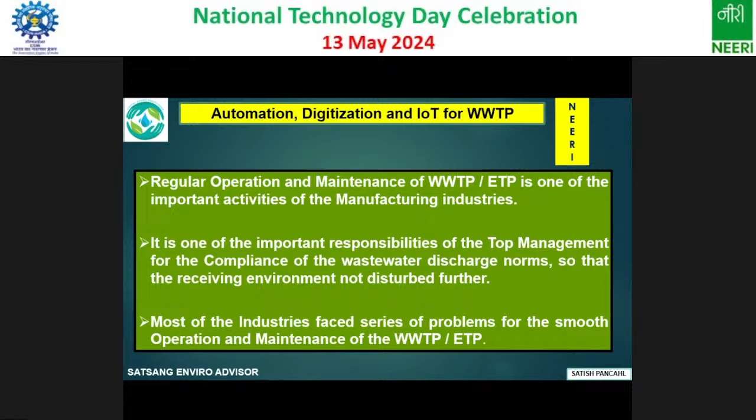So most of the industries have a double standard. So we have to convince the industry and train them.

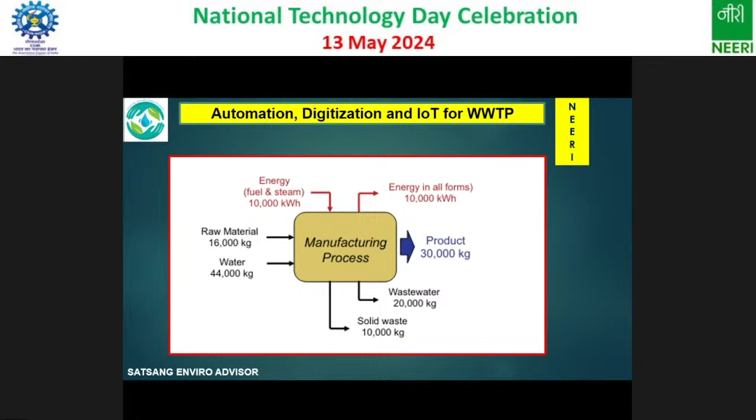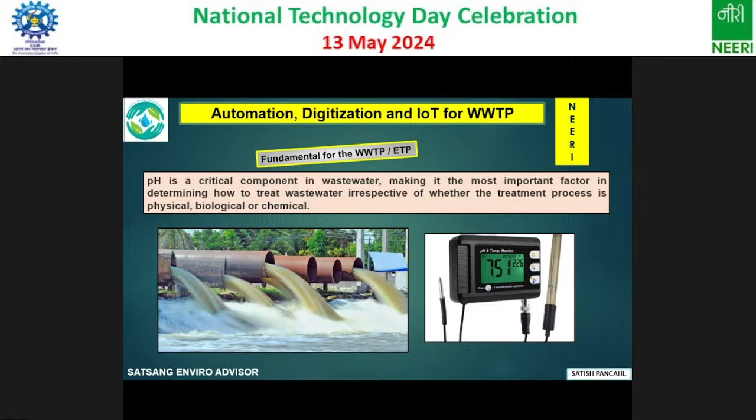Now sewage treatment plant, a lot of time we discuss why the sewage treatment plant is not functioning. What we discharge in the sewage treatment plant from our home: we wash our floor, we use a lot of acid, we use a lot of alkaline in the washing machine, floor washing, a lot of phenyl we are using. That all goes to the sewage. Even sometimes the sewage treatment plant, you cannot check what is going on. It contains a lot of solid materials.

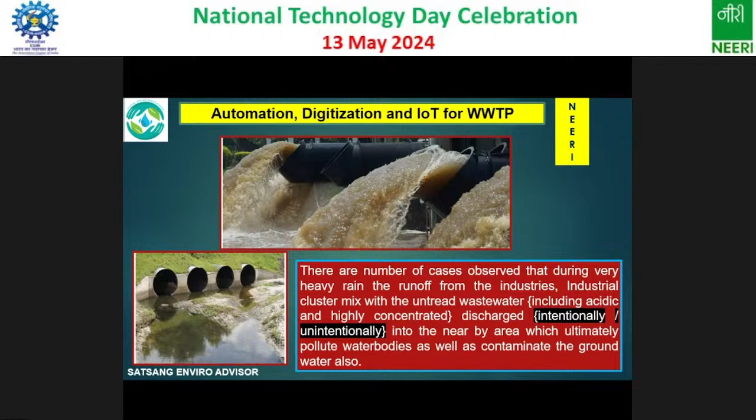Even recently you read in the newspaper or on TV also, Dubai had a flood. As Madam had mentioned, I was working with the Kuwait KNPC in 2005 when I joined in the month of January. And in my first round in the introduction, I asked a simple question: do you have a stormwater tank? They said we don't have rain. Just imagine, they have to construct a stormwater tank. So the entire situation has been changing day by day.

Second point is the neutralization, where we have to check the acidic wastewater or alkaline wastewater. Generally in industry, this is the area of R&D, I can say. Not R&D, research, development and demonstration. Now we have to change the name. Recently I was reading the article on Dubai mega trends, the 50 mega trends, Dubai Future Foundation, and they mentioned R&D as research, development and demonstration. Sir has already mentioned that demonstration is very important.

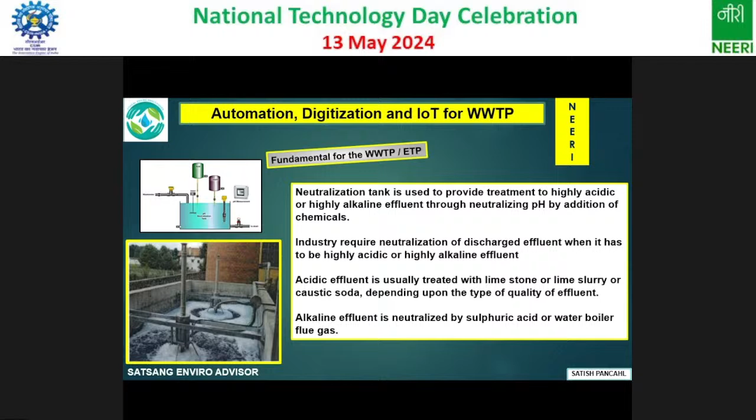But what happened? It will give an instant result. Nowadays, like instant food, an instant result comes. But they damage your entire agitating machinery. They deposit the solids and they create a further problem in your plant system.

I mentioned one of the names, Professor M.T. Pandya. Dr. M.T. Pandya, I think you have heard the name. He was a professor of Jain Engineering College. He was associated with us in 97, 98 in one of the biodegradable issues. And at that time, he advised: forget about the lime, do R&D on different solutions. So at that time, we checked caustic lye, caustic flakes, soda ash, and then we decided a caustic lye 10%, 15% solution is the best solution for neutralization. So neutralization is very important.

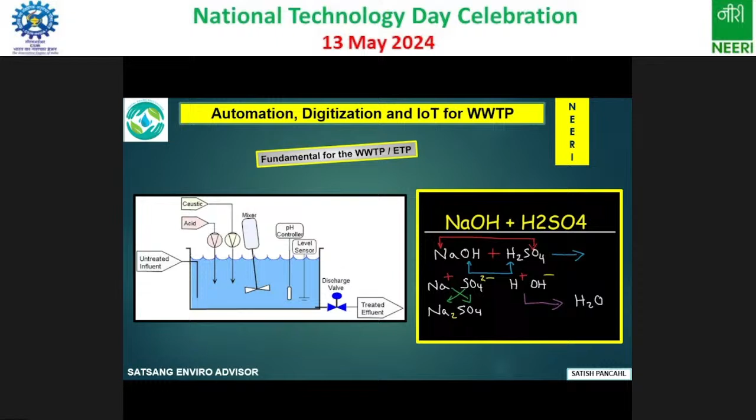So everybody knows. So how to do digitization here? We did digitization by putting a dosing pump. And the dosing pump you can control with IoT. So you can check from your home also how much lye has gone into my neutralization area. So this is possible now. Technology is available. So an IoT-based pump monitoring system can improve efficiency, visibility, and predictive maintenance also. Because in a wastewater treatment plant, maintenance is very high, because nobody is looking after it very seriously.

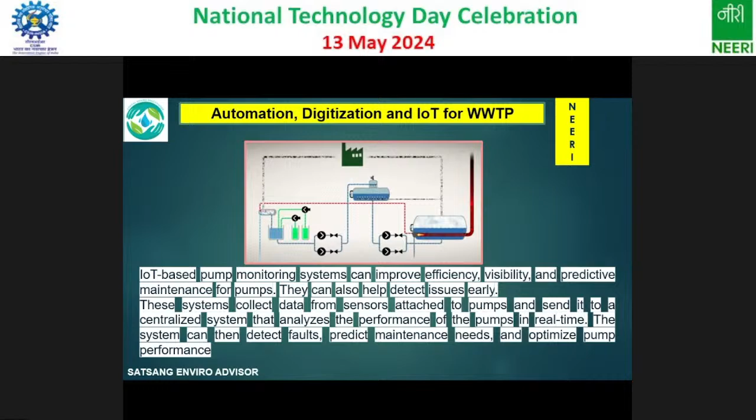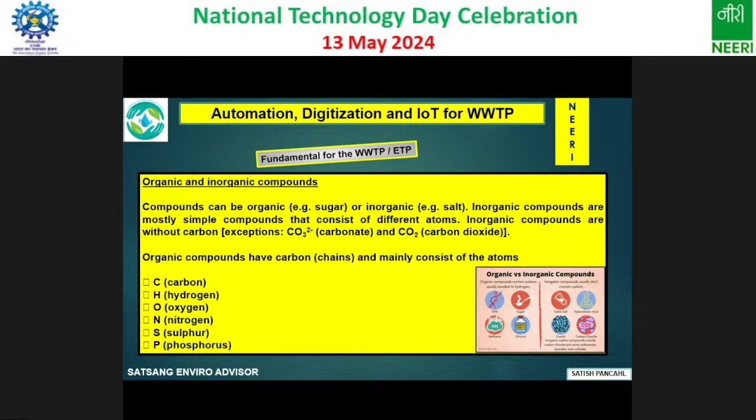Then after that, we move on from neutralization. Now we have to identify which are organic and which are inorganic. Because we have the activated sludge process, trickling filter, even RBC, the rotating biological contactor, it is a failure in India. When I visited Munich in 2018, I had seen a number of RBCs. They contacted us, why don't you market my product in India. But it is a failure in India. But it is a very simple technology. Why is it a failure? It's a surprise. Because we are not concerned about regular maintenance. So carbon, hydrogen, oxygen, nitrogen, sulfur, and phosphorus, we all know all this. But why should I mention it here? Because this is the fundamental of wastewater.

Then it comes to coagulation and flocculation. Generally, they add alum and polyelectrolyte. 300 rupees a kg, 400 rupees a kg.

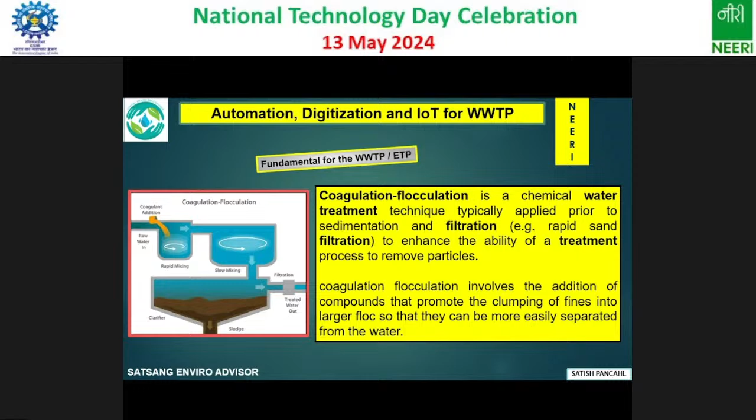In one of the pulp and paper industries in Surat, it has a 26,000 meter cube per day treatment plant. It was a very scientifically designed treatment plant. But when we went for the operation, we faced a lot of difficulties due to bypassing of the flocculation and coagulation tank. So these are the issues you face in the industry. Then comes the equalization bit. So once you have flocculated, coagulated wastewater, now you have to do equalization.

And in the morning I discussed with Prakash Bhai, why is CETP failing? You know, the CETP concept, even Professor Khanna also emphasized at that time, it must be a homogeneous nature of wastewater, and then you can design a wastewater treatment plant. But nowadays, it is a heterogeneous nature of wastewater. It is very difficult. You visit any CETP plant, it is very difficult. But now, as a scientist, as an engineer, we have to find the solution.

Why shouldn't agrochemicals, petrochemicals, then drug and pharma, then the electrochem industry, all these plants have primary treatment? Remove the metal, remove the toxics, and then go to aerobic treatment for the CETP, if we want to go for a CETP. So flow equalization is very important.

Here, the diffused aeration system, a lot of people use. And diffused aeration systems mostly come from abroad. But now with simple technology we implemented in one company, we just made laterals and a header and put a good quality blower after calculating the flow rate and others. It works.

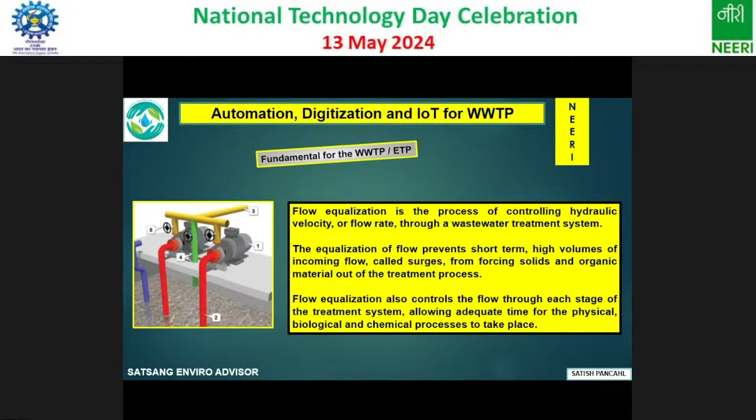In 1998 I had implemented it, and till now it is working. Yesterday I got the message, sir. मैं पूछा था भाई वो चल रहा है, मैं कल बोलने वाला हूँ, so it is working. So sometimes jugaad also works, but it's a scientific jugaad, not only just to put in show.

Then primary clarifier. Here I mentioned the name of Dr. Badri Narayana. When he visited my plant in '97, he observed a typical smell. We had just acclimatized to the smell, so we had not observed any smell. And he said, Mr. Panchal, this is a typical anaerobic smell. What are you doing? So we discharged the primary bottom sludge into one sump, and then from the sump we discharged into the drying bed, and it was retained for a few days. So anaerobic conditions developed. He made a simple solution.

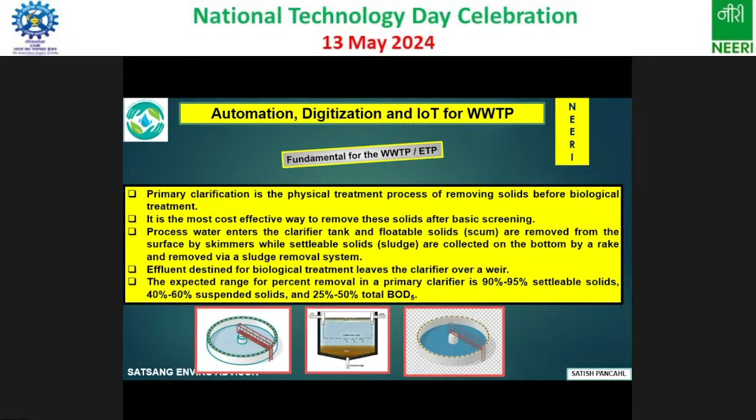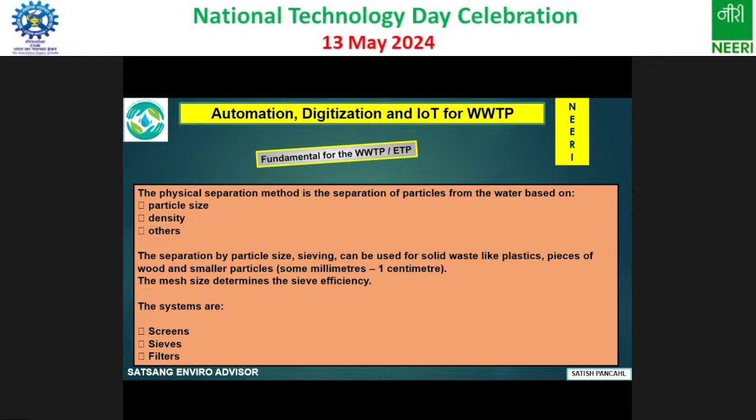So it depends on particle size, density, and others. Other methodologies are also there, screen, sieve, and filters that I think we already learned. And these are the different steps of the treatment. So screening, sedimentation, flotation, biological process, you may go for a trickling filter, you may go for RBC, you may go for ASP, anaerobic digester. I think anaerobic digester is called a failed technology in India. A lot of people say it is not working. It is not failed, it is an operation issue.

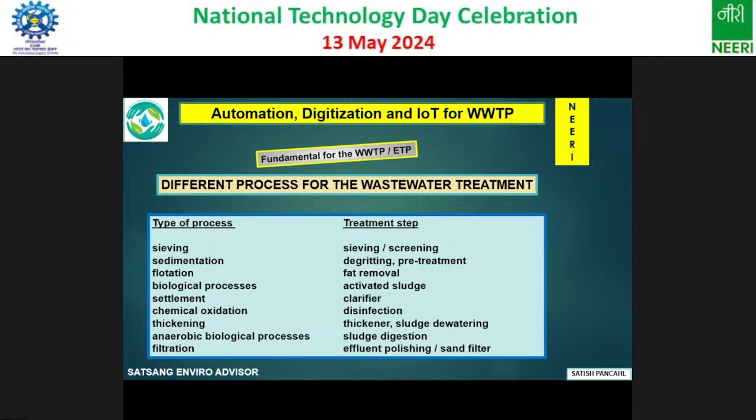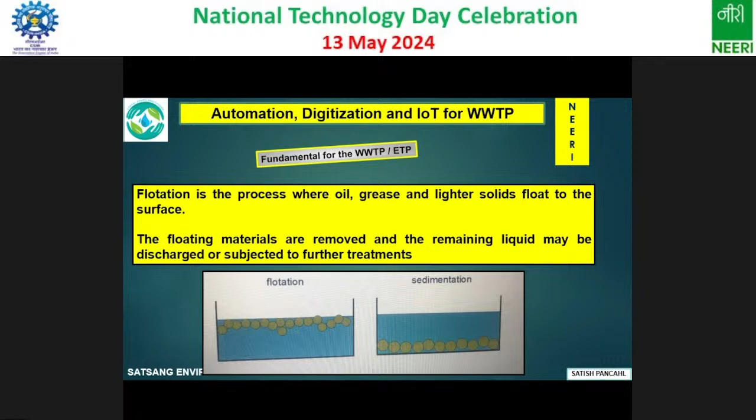There are a lot of plants we have observed in Gujarat. It is not a failed technology. We are not concentrating on the operation and maintenance. Then anaerobic and filtration. And these all are the treatment steps. Flotation and sedimentation, I already mentioned. So I think in the morning you already saw some of the decentralized sewage treatment plants. So the same concept. This is engineering, you are scientists, so we mix together and find out a solution.

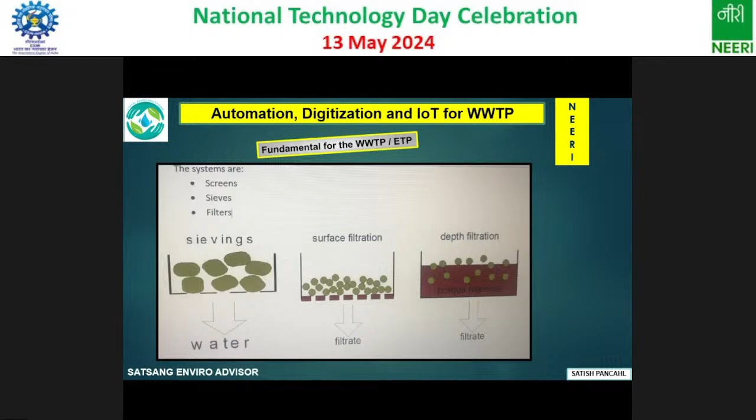The sieving like this one, I think this is your case. The sieving, then surface filtration and depth filtration. तीनों point आपने cover किया. So it is already there in place, already mentioned in the engineering philosophy. In the chemical process, as I said, we add ferrous ammonium sulfate. Then we add the polyelectrolyte. So these all are the reactions. And sometimes disinfection is used to kill the bacteria.

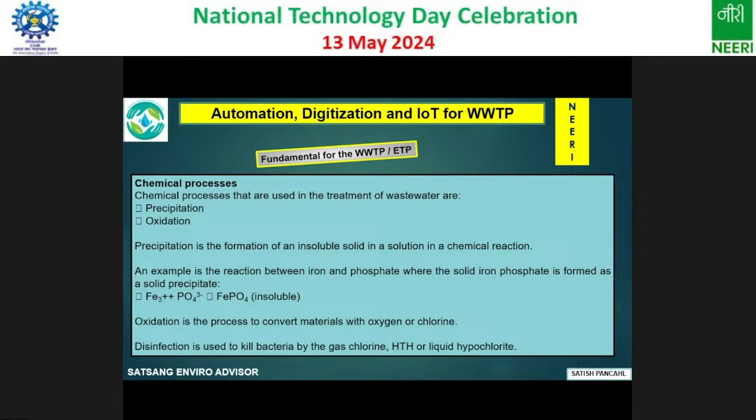So the rotating scum troughs and skimmers effectively remove all grease, scum and floating material. Come until and unless the as-built drawing and original drawing meet the same criteria.

Then this system will work. Otherwise, industry is ready to spend the money, but they are not getting the result. So this is a very important issue. Some of the industries are now more ethical, even one of the industries I worked for 10 years.

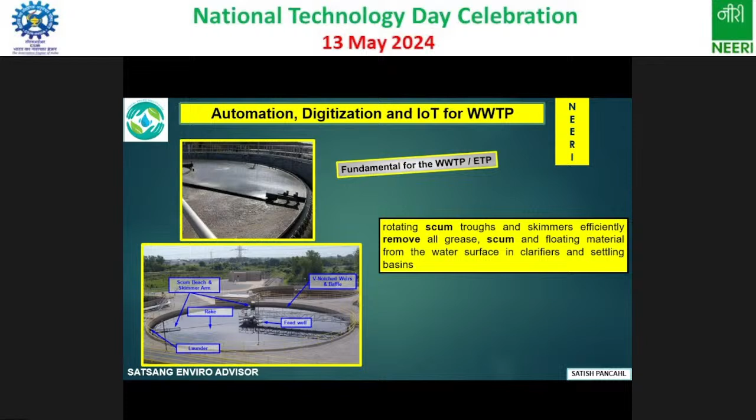Dr. Shyam Asolekar spent at least 3 months in 2018-19, before COVID. He made the material balance of 6 industries, and those are very dangerous manufactures: H-acid, vinyl sulphone, DASA, and dye intermediates. It contained all the pollutants, and he evaluated what the solid waste generation is versus what they explain to the authority. Vast difference. So you cannot solve the problem overnight. You have to go more and more deep.

Sludge dewatering. This is very important. Actually, my main interest is sludge dewatering. During 1999, we faced a serious problem. Dr. Badrinara visited my plant, and he said, Mr. Panchal, sorry, I'm not happy with the performance of your plant. Because we mixed primary clarifier sludge and secondary clarifier sludge in drying beds, it never dried, even at 40-degree temperature, up to 15 days, 20 days.

Then we decided, let us have some sort of dewatering system. My management gave full authority, even the project department. Mr. Panchal, you find out the agency. I visited Nagpur, Pune, Hyderabad, Chennai, Delhi. I gave 200 liter slurry samples, and I gave a contract also for a small amount. You just give a solution. At that time, Bharat Enviro Engineers gave a solution of a rotary vacuum filter. We installed it in 1999 for 20 lakhs of rupees, only for primary clarifier.

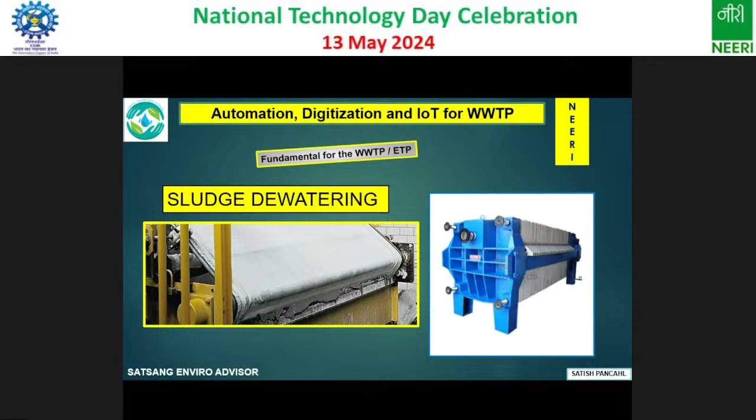But this system is working. And the filter press, I think in most industries in Maharashtra, I had visited some of the industrial belts. There are a number of filter presses, but it is so dirty you don't feel like going there. So how to make it smart? How to make it clean? That is our activity.

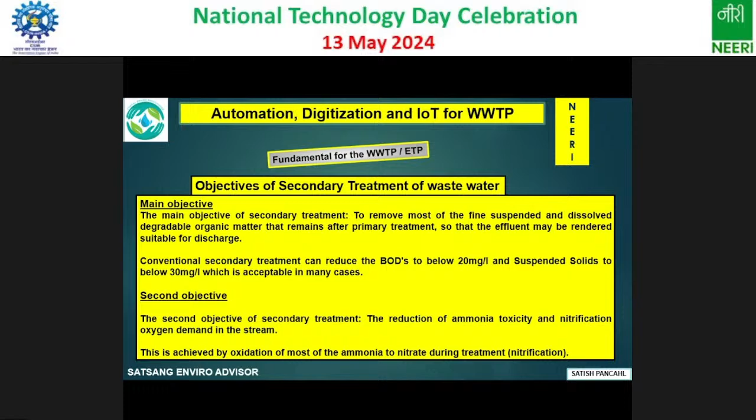You ask them, do you know denitrification happens, and they don't know this. We just call the casual worker and remove the top sludge - this is the only answer. So proper engineering, proper science has to be implemented. We implemented this in one of the industries in that area.

So there are three types: aerobic, anaerobic and facultative mixed type of treatment. This is very important - it may have a diffuse aerator, a surface aerator, or different aerators nowadays.

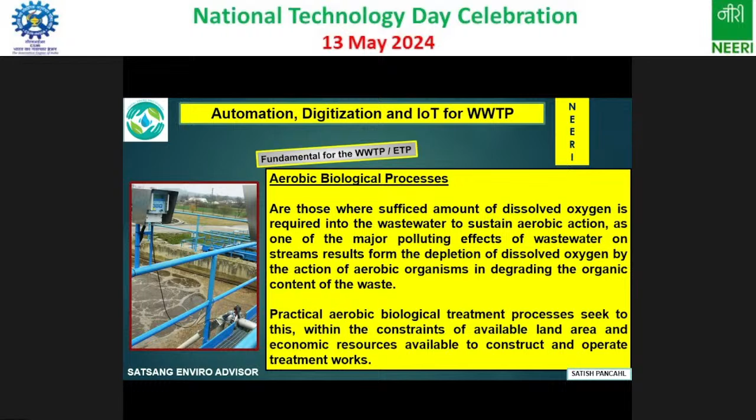Then anaerobic treatment, as I mentioned, basically produces biogas, but it is considered a failed technology by some. But I have good experience in Ashok Organic, as I mentioned earlier. There is one good plant, India's first biogas plant. They have a distillery, molasses and spent wash.

Spent wash has a highly acidic nature, 3 to 4 pH, high COD of 3 to 4 lakhs, and very high temperature. So that wastewater we treat and generate biogas, and that biogas we supply to the boiler, and the boiler generates steam. That steam is supplied to the fermentation process for acetic acid manufacturing.

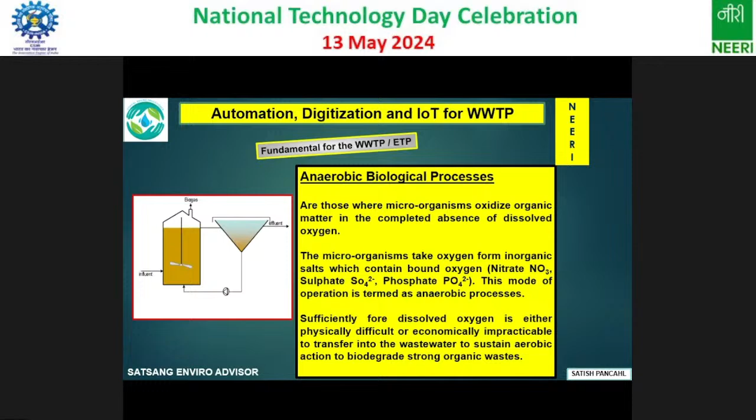So these technologies are good, but they have to be properly understood, properly designed and properly operated. As I mentioned, trickling filter and RBC we don't prefer, but RBC is a good technology in a decentralized way. Activated sludge, oxidation pond - a lot of people use these, but now land is not available, so you cannot go for oxidation pond. And aerated lagoon - you can change the name of aerated zone bioreactor to aerated lagoon.

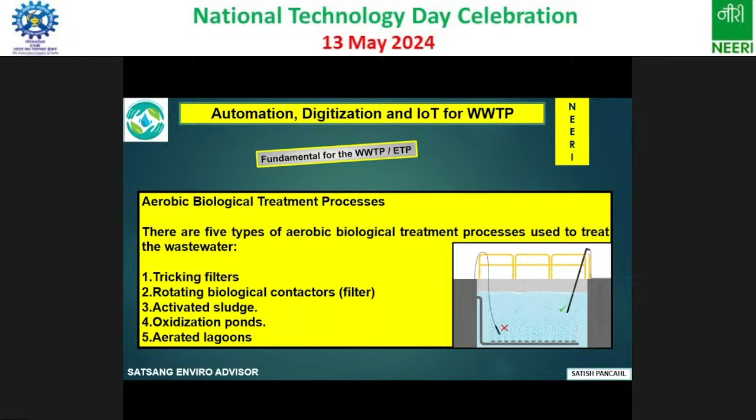This works, industry people do this. So in activated sludge process, the few important parameters are like MLSS, mixed liquor suspended solids. I think a lot of students are here, you just need to understand how to analyze. Even I remember when NEERI people visited my plant in '97, they asked me, Mr...

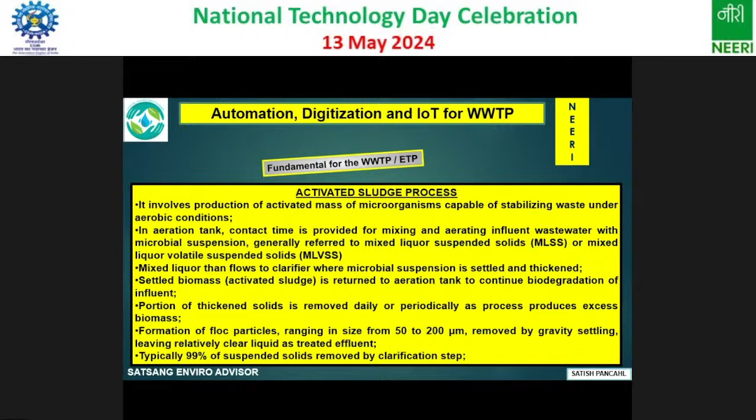So typically 99% suspended solid is removed in a clarification step, primary and secondary. Everything is everywhere, but the environment selects. This is very important for microbes. Microbes play a very important role to degrade the pollutant - any pollutant they degrade. Only thing is we have to be smart, like the microbes.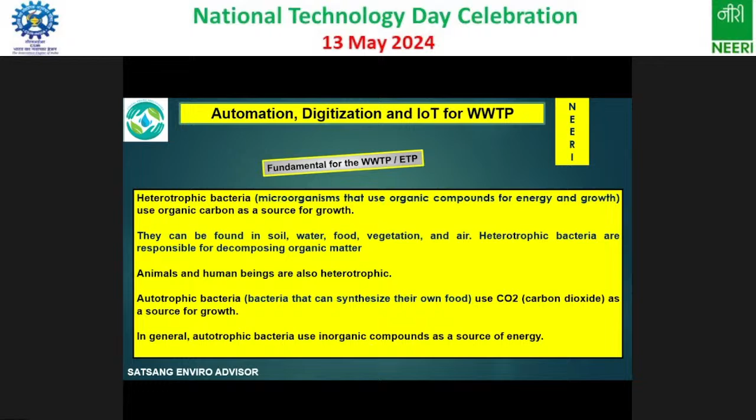There are two types of microbes, heterotrophic as well as autotrophic. I think people are aware. Microorganisms that use organic compound for energy and growth are called heterotrophic, and bacteria that synthesize their own food, like with the sun and atmosphere, are autotrophic. We have to choose the right bacteria.

There is a lot of demand in microbiology. I think in MS University, those passing MSc microbiology have very high demand. But most of them join the pharma industry, not the environment industry. So whenever we have discussion in the university, we always say send 2 out of 10-12 students here, so we can also develop our microbes further. But now the trend has changed.

Bacteria will grow when enough food is available. Now what is enough food? The wastewater itself is enough food.

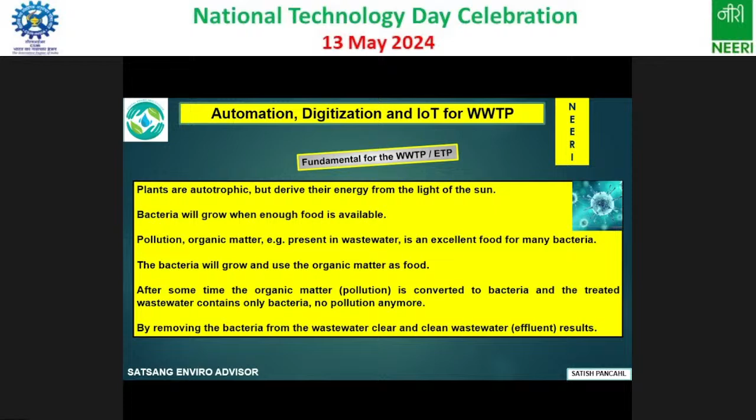So just imagine, it gives an instant result, but it's better to develop bacteria through soil enrichment technology or microbes. After some time, organic pollutant is converted to bacteria, and the treated wastewater contains only bacteria, no pollution anymore. That is a tertiary treatment we can implement.

Attached growth, suspended growth - I think these are part of the activated sludge process. But my main interest is to highlight the role of microbes, because microbes are responsible for treatment and maintaining liquid suspension through appropriate mixing method. That's why we require a diffuse aerator or whatever aerator is available.

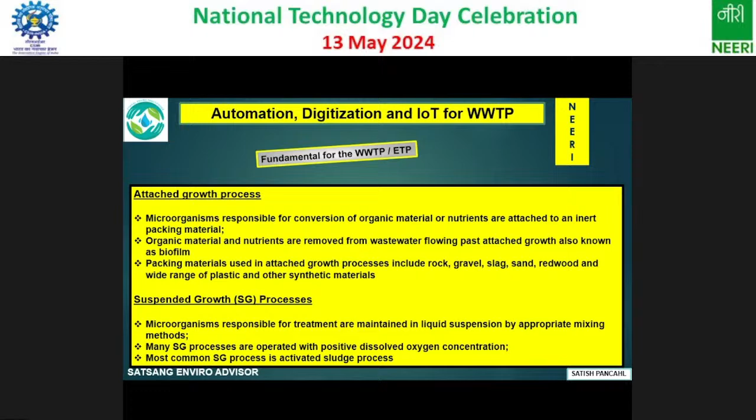Nowadays many new names are given just to sell the technology. Lot of consultants are available in the market. Biological processes are conversion processes of material by living organisms which degrade it.

Wastewater treatment bacteria are the most important group of bacteria - they are the workhorses of the activated sludge process. They are like our army, and we should protect them.

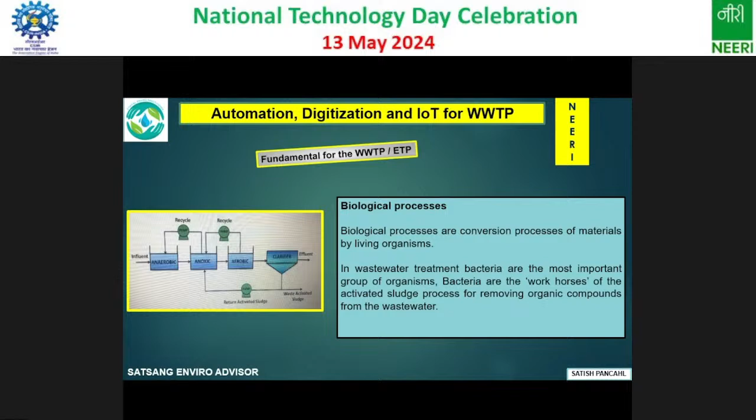Now a lot of people don't understand the importance of this parameter. It's like in food, everyone needs this vitamin or that - nowadays everyone is deficient in B12, D3, everywhere you go they say you're low in D3 or B12. So BOD, N, P is very important for the activated sludge process.

In 1997, we calculated on a daily basis - how much BOD is there, how much nitrogen is required, and how much phosphorus is there. Before that, we just used to add urea every day for nitrification. For phosphoric acid, they'd say just pour in a can of phosphoric acid, a 5 or 10 liter can. Then we implemented automation - a simple dosing pump.

वो भी 25,000 का आता है, उस टाइम 15,000 का आता होगा, अभी 25,000 का. उसमें भी innovation बहुत है.

Synthetic wastewater prepared using methanol, glucose, and acetate as combined carbon source, ammonium chloride as a nitrogen source, and dipotassium hydrogen phosphate as a phosphorus source.

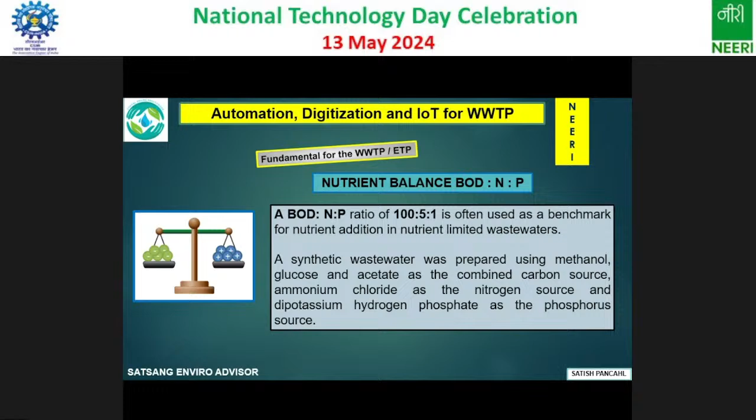Phosphoric acid, यूरिया में कितना है? यूरिया का फॉर्मूला भी नहीं आता है. After working 20 years in the industry, we asked the question, can we explain the formula of urea? Every day the urea का खेलता है, पर वो नहीं बताता. So that is very important.

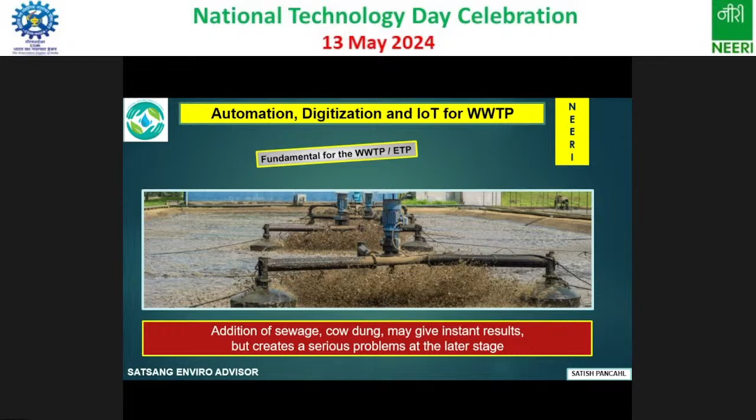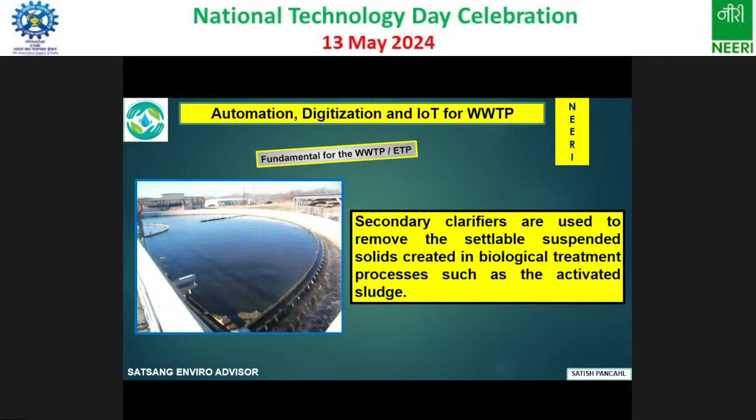So why should they not have a separate sewage treatment? So secondary clarifier used to remove the remaining parameters, remaining suspended solids. जो recycle sludge, जो aging of sludge हो गया उसके बाद.

No smell, इतना अच्छा and they are not allowed to construct even one brick because there is resistance from the Thane people not to allow any further expansion. तो वो बम्बू लेके ड्रम के अंदर बम्बू रखते थे और पूरा टारपोलिन लगा के मॉनसून में कंट्रोल करते थे. सेम टेक्नोलॉजी में इम्प्लीमेंट किया and within 1 lakh rupees cost we just settled all the sludge.

Primary separate कर दिया. And second, this is only secondary sludge. And what we have done further, we made a compartment. Now Monday we discharge in one compartment, Tuesday in the second compartment, Wednesday this one, Thursday this one. And within a week, I have a liberty.

ये खाली हो गया, दूसरे दिन वो ले सकता हूँ, तीसरे दिन ये ले सकता हूँ. So we have a liberty. So this is a smart automation I can see. Land is not available nowadays, but whatever land is available, we have to make it very systematic. And this is a very important area in all industries.

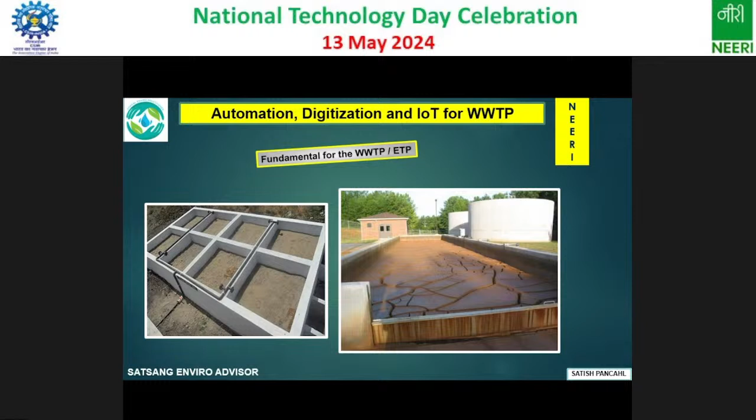You visit any industry, PSU or MNC, this is the most dirtiest area. अब कहीं भी जाइए, मैं आपको खुलकर बताता हूं, मेरा 35 years का experience है, मैं कई industry में visit किया है, मुझे तो ये एरिया बहुत गंदा लगा. But now people have realized, समझ रहे हैं कि कैसे improve किया.

Now another thing, industry always wants to know cost, economy and environment. हमको मैनेज करना है, डाइवोर्स नहीं करना है. तो लंबा तक रहे - हम बात कर रहे थे कि आजकल डाइवोर्स भी बढ़ रहा है, डाइवोर्स रेट भी बढ़ रहा है. तो इसमें भी डाइवोर्स रेट पहले से ही था. तो हमको तो उसमें महाराज बनके प्रॉपर शादी कराना है.

How we can maintain this? So how can we convince the authority or the top management, chairman, president or managing director about the costs? What are my chemical costs? What are my electricity costs? What are my sludge transportation costs?

If I use lime, my sludge cost is very high. When my sludge cost is high, my disposal cost is also high. Now landfill is not available. Now in Baroda, they are not going to expand any landfill. It is very difficult to get approval. And there is a lot of resistance from the community also.

Not in my backyard - no one wants kachara. And why should we end up like that? Superfund issue in America - आज भी चल रहा है, 150 साल पुराना issue आज भी चल रहा है. But that is a developed nation who can afford it. But India cannot afford it. हमको वैसा situation नहीं देखना है. हम तो नहीं रहेंगे 100 साल बाद, but it may happen. So हमें management को convince करना है.

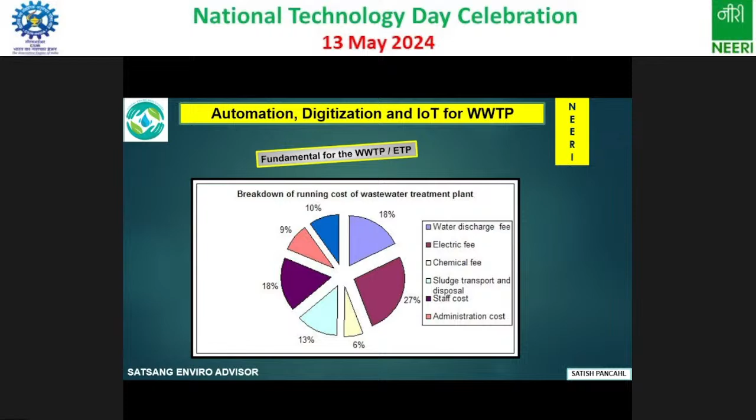Administrative cost तो आपका है ही, वो तो मैन पावर है. You cannot consider it as a separate cost of environment, but I consider it as an administrative cost in environment, so I can contribute further, and this data will help in ESG implementation. Environment, society, and governance में बहुत important आता है.

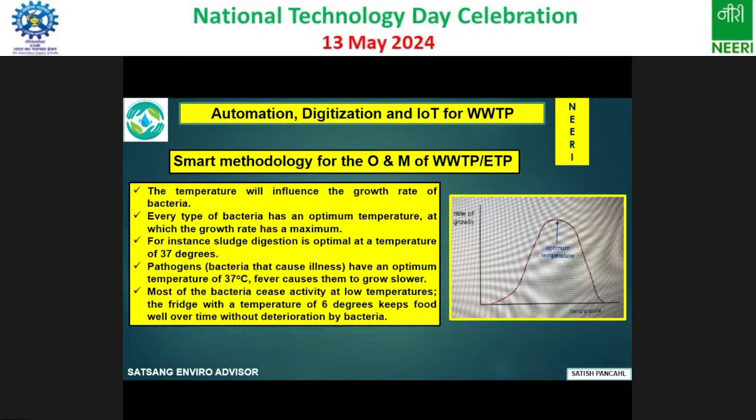Temperature, that is very important as I mentioned. We have to measure the temperature. But I had seen in Kuwait also, the activated sludge process, same process, even at 50-55 temperature, ASP working very nice. No issue. I had seen in 1 year the entire refinery waste; in spite of a lot of oil and grease problems, the ASP is working very fine. So ASP is a very good technology. I am not marketing ASP, but this is a technology.

Dissolved oxygen, it has to be in between 1 to 2, it has to be maintained, and a dedicated instrument has to be implemented in every ASP. अगर ASP इसके बिना है तो allow ही नहीं करना चाहिए. Sorry, I am not going to approve your activated sludge process plan.

Control philosophy, that is the inlet and outlet, primary effluent and final effluent. So age of bacteria, that is very important. How to drain it, how to recycle. In one of the industries, they continuously recycle.

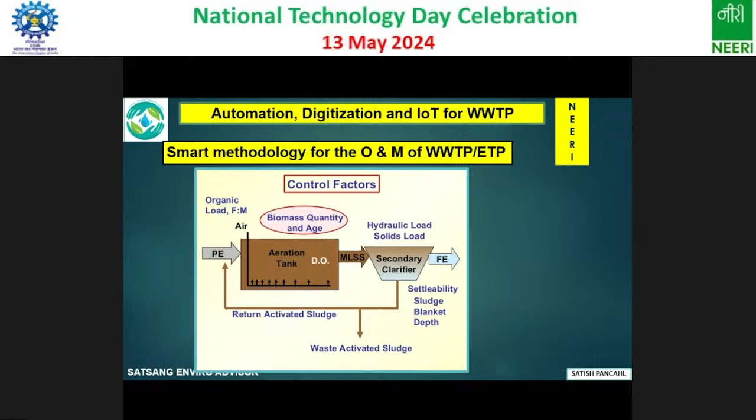Very difficult. So we have to check BOD is to N is to P. So conventional activated sludge में 0.25 to 0.45 is a standard ratio. This is my own experience, and we had evaluated for more than 10 years. Every week we evaluated FM ratio. And extended aeration, okay, उसमें थोड़ा ज़्यादा air होता है, तो 0.05 to 0.15 तक चलता है.

Key monitoring parameter, this is very important. The mixed liquor MLSS, MLVSS has to be checked. Volatile portion, that is very important. If the solid loading exceeds the plant design capacity, the MLVSS needs to be adjusted. This is very important. Nobody is thinking about this sentence. If solid loading exceeds, पर solid loading calculate करना आना चाहिए.

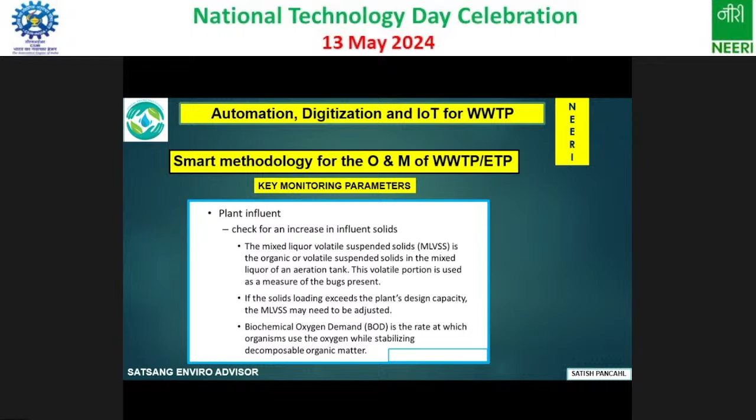वो बोले मेरा BOD 50 आ गया तो मुझे भी लोडिंग का टेंशन नहीं. No, BOD आज 50 मिलेगा, कल नहीं मिलेगा. So you have to make a consistency. And BOD is the rate at which organisms use the oxygen while stabilizing decomposable organics.

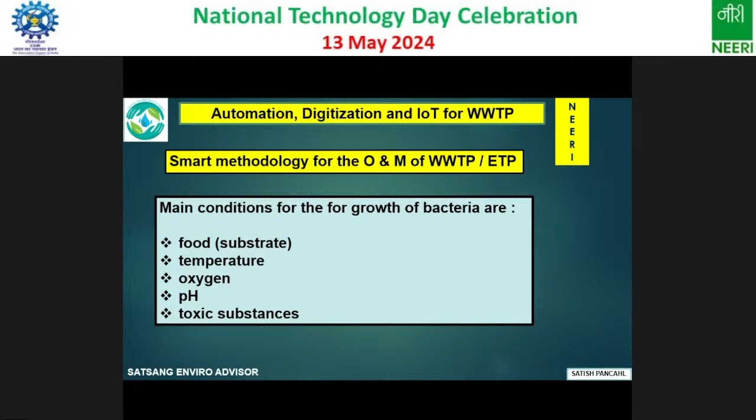So CETP में ये problem होता. CETP में इलेक्ट्रोप्लेटिंग का मेटल फिनिशिंग वाला भी आता है, तो कहाँ चलेगा? Because it contains lot of toxic substances. Phenol होता है उसमें, बैक्टीरिया नहीं सर्वाइव करता है. You have to develop a phenolic bacteria. Then you can adjust.

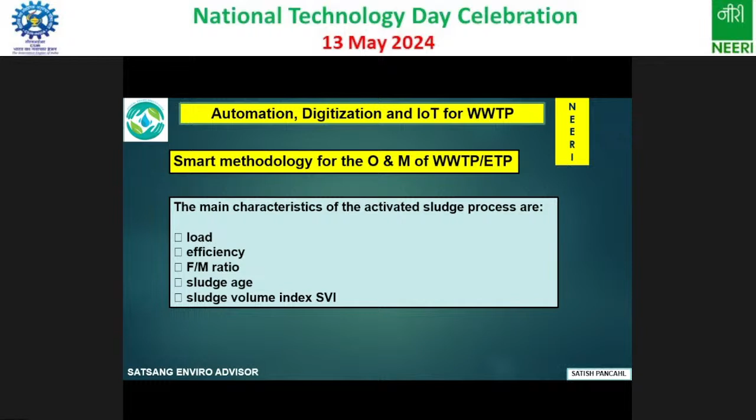Load, efficiency, FM ratio, sludge age and SVI, these are the important characteristics for ASP. The same thing. So mixing in the aeration tank, DO level and type of microorganisms. That is very important. कि कौन सा microbes है वो आपको decide करना है.

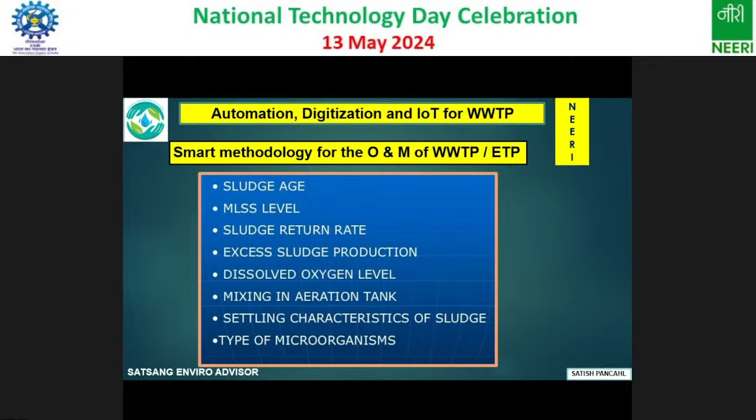In some of the industries we have installed a vibrating screen, basically in a neutralized effluent. Once it is neutralized, it has a lot of fine particles, so it is very difficult to remove them in the primary clarifier. They are floating particles, even with any flocculant or coagulant. So at that time we decided to have a vibrating screen, and it successfully worked in one of the industries in Nandesari.

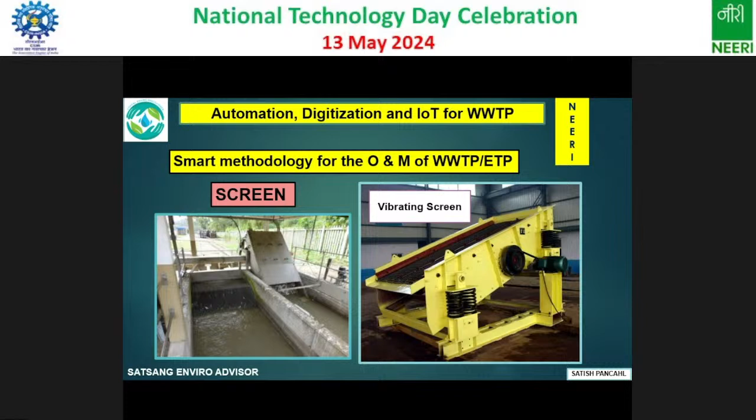It gives 100% result. During my period we installed one; now they have 10 such vibrating screens in different areas. So this is the basic. I think everybody understands the input and output. It contains everything: bioreactor, even anaerobic also, particularly in other countries.

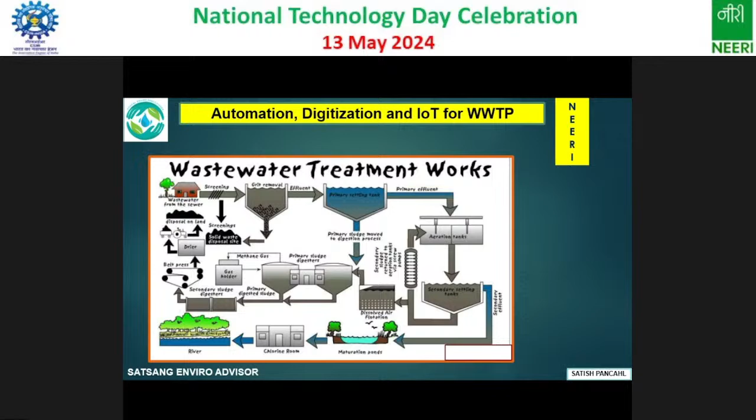So some of the important parameters, the smart way: operating schedules. This is very important. What are your operating schedules? Where you have to add the phosphoric acid, where you have to add the urea solution, where you have to maintain the DO. दिन में ज़्यादा और रात में कम रखो, then you can save the energy.

Then operating KPIs. This is very important. ISO 14001 definitely requires all these things. But operating KPIs: how to operate the neutralization tank, how to operate the flocculators. These KPIs we are preparing for the industries; that's a part of ISO. Then data collection and monitoring. Now this is a data age, AI and machine learning. Response with the corrective action.

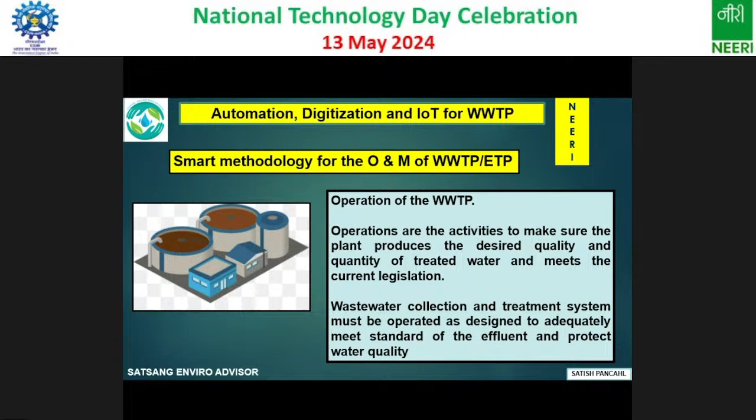So the wastewater collection and treatment system must be designed and operated to meet effluent standards and protect the water bodies and water quality. So it's a very complex process. It is not easy, as Sir already mentioned. It is not at all easy. It's not Maggi noodles. This is a really serious challenge for wastewater treatment in any industry, small scale or medium scale. Many situations occur which can lead to disruption of the process.

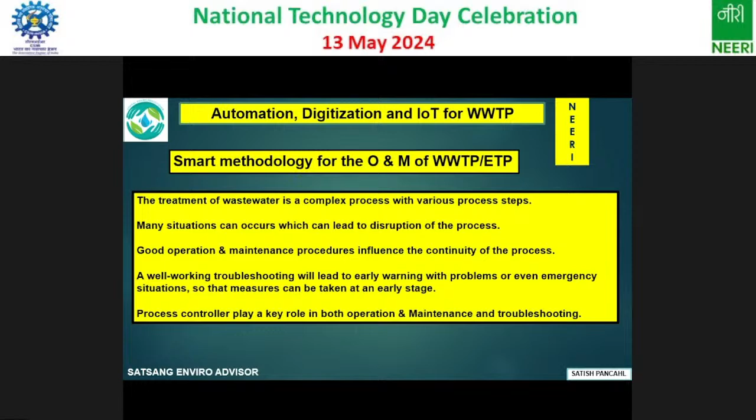So any situation can occur at any time, we have to be ready. So good operation and maintenance procedures influence the continuity of the process. Good troubleshooting will lead to early warning of problems or even emergency situations, so that measures can be taken at an early stage. So the process controller has a key role in the operation and maintenance of wastewater treatment. So size is very important. Know your team skill. This is very important.

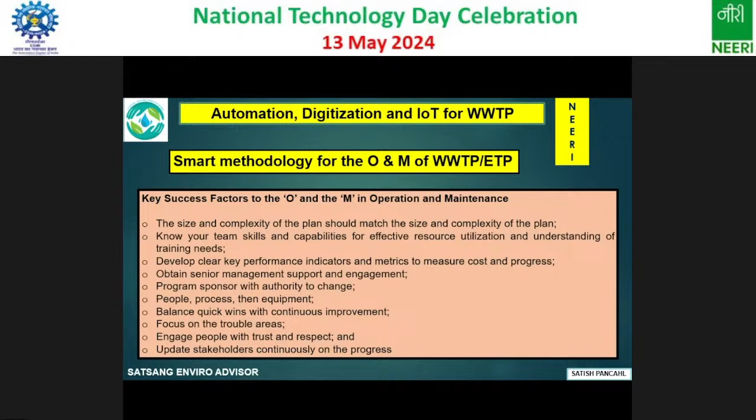So we have to give respect and update stakeholders. This is ESG. अभी stakeholder पूछ रहा है कि आपका क्या है performance? How are you managing your environment, not only water, but air and hazardous waste. So this is the ESG era.

This is the live example. In my previous organization, we had implemented the IoT, the Internet of Things valve. So at the wastewater discharge outlet, we put one valve. This is a very simple valve, only 30,000, 40,000 rupees cost. 34 valves we had installed.

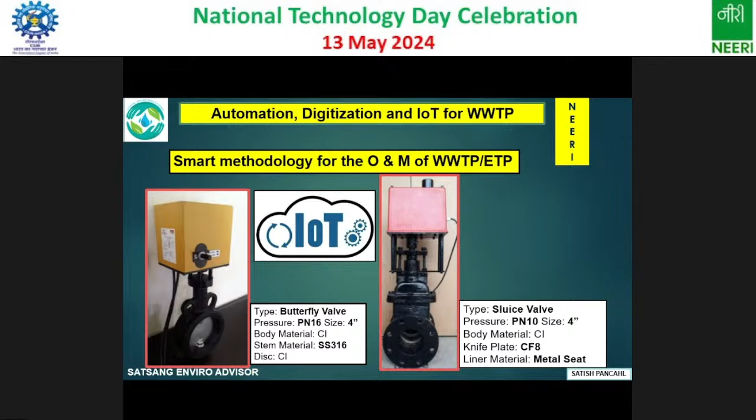And this is an engineering parameter, but the main function: if your wastewater does not meet the norms, if your quality is deviating from the permission, then the valve will open in the opposite direction. So your effluent goes back to the treatment, not to the receiving body. So this is a very positive sign we have implemented, and it gives a lot of approval. So these are working. Even the next slide.

This is the live example. And so I trained one environmental engineer. Now this girl is working in Mumbai also, in one of the companies.

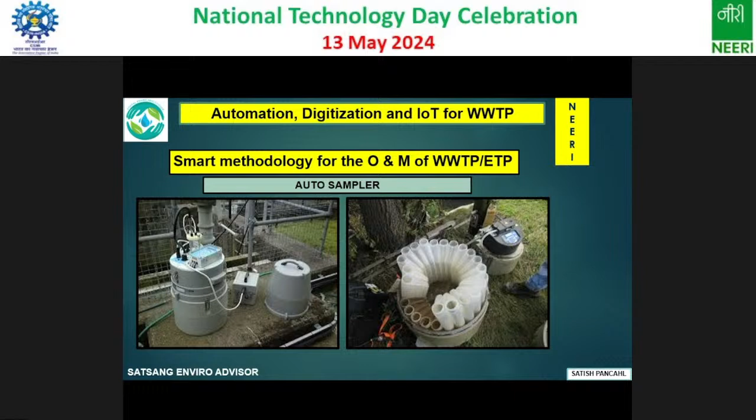Robotic operation, like in the extended aeration zone, or sometimes we have to clean it. In my previous organization, we faced a very serious problem.

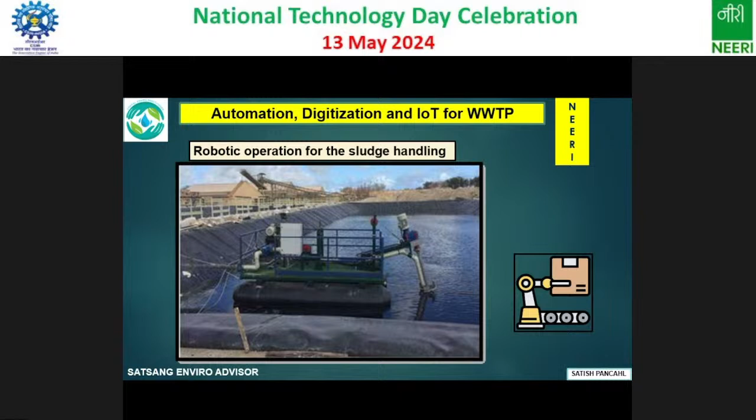The good thing in India was that the gasket you have to change every year. Whether it is damaged or not, you have to replace it every year. So it gives peace of mind. After preventive maintenance, you should not worry about corrective maintenance. So these technologies are available, a lot of technologies for robotic operation of the sludge.

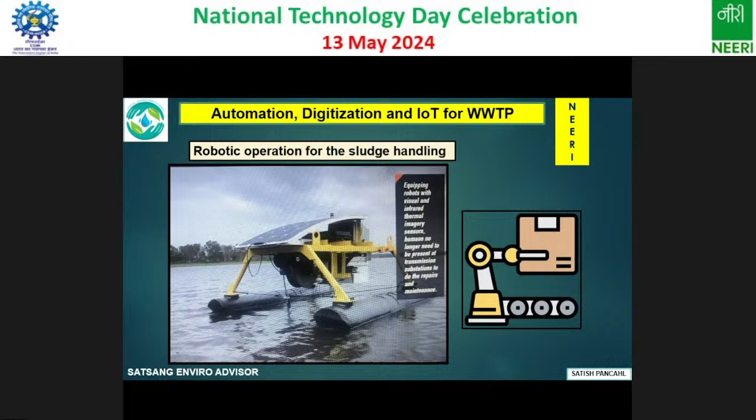So what we have done, first we implemented the real-time online monitoring system. The flow meter was first, in 2010-11, to identify the quantity, because quantity was the bread and butter. Quality was not our issue, it was managed by the authority. So we installed a dedicated flow meter first. It gives 15-minute data on a dashboard. Then in 2014 we forced them to go for a real-time online monitoring system measuring 6-7 parameters.

Then we forced them to, in 2017, before COVID, purchase the auto sampler in a phased manner. And in 2018 we forced them to go for a 3-way valve, all member industries. So if any of the 6 parameters does not meet the norms, the valve will open in the opposite direction. If your flow meter is like 500 meter cube a day and you discharge 510, at that time your valve will be open in the opposite direction.

And the auto sampler will collect all the 24-hour samples, so we can identify at which time the disturbance occurred. And all this has to be checked at the control panel, the control panel at my office. So we can control, and then all the data we give to the authority. So on the dashboard, the authority can check at any time. Even in a live session, I had mentioned that all CETPs have to implement this one.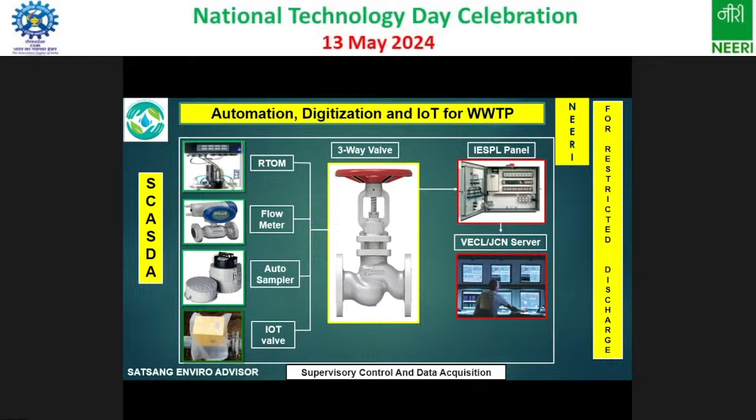And the next slide is for the restricted discharge. So for restricted discharge, one additional one is the IoT one, where we have to open it and where we have to close it. So these are the systems. Live example, it is working since the last 5-7 years in my area. And very simple cost. We have done a lot of R&D, I can say, a lot of R&D. So this is all the system.

A few years back, the entire world was struggling under the violent pandemic COVID-19. And during COVID, nobody was ready to touch the wastewater. There were a lot of reports that it contained sewage and it may have a COVID infection. So even my people were very afraid. But at that time, we trained them, we provided a lot of safety appliances. Regularly, we sanitized the areas, sanitized the containers also. Then they worked with the system.

Yes, this is very important. Now, how to do surveillance? We have a 55-kilometer long area. In one area there are 10 CETPs, just imagine. How to measure? So during 2016-17, I sent a proposal to the Director General of Civil Aviation. I wanted to use drones to check who is doing illegal activity at night time. Because we cannot put a jammer. For a jammer, you need approval from the commissioner. We also tried that, but it was not permitted.

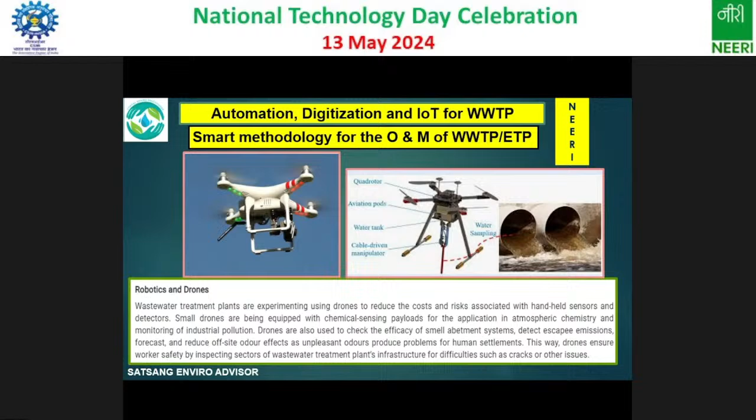So I wrote a letter to the Director General of Civil Aviation, but at that time there was no policy. They said first approach your local authority. We contacted the local police commissioner. They had not given permission. Nowadays, permissions are available, so why should we not implement? And now I understand that drones also take samples. The drone comes down and takes samples in an open area, when they discharge into the river, like some of the river issues we have. So that can be possible.

And the analytics, data analytics, that is very important, artificial intelligence, that we can definitely check. So computer, IT, chemical engineering, all support the environment to achieve the results. So this is from my side. Any questions?